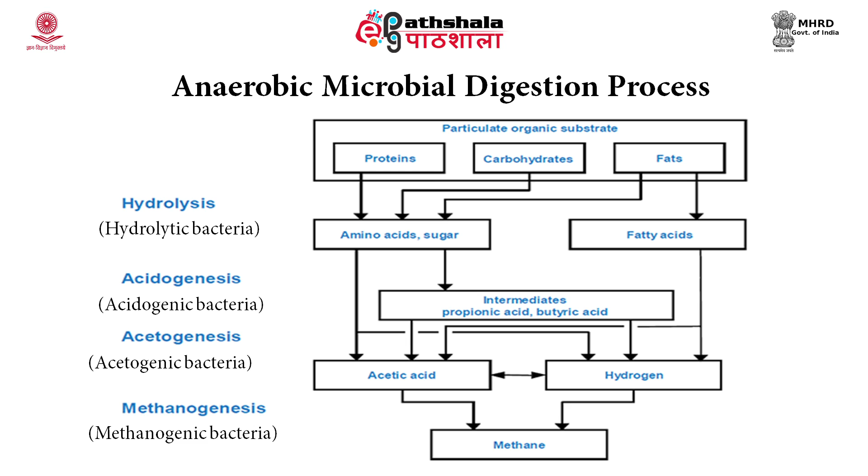Now the third phase is acetogenesis phase. In this phase, acetogenic bacteria play a very important role, and the intermediates are now being converted into acetic acid or hydrogen. Methanogenesis phase, that is the important phase. In this phase, methanogenic bacteria play a very important role, and they try to convert acetic acid and hydrogen into a valuable product, that is methane.

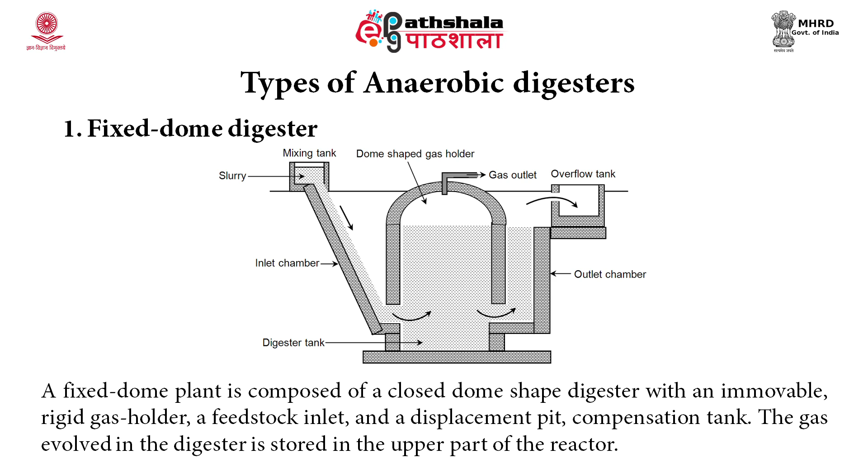In this slide, types of digester have been explained. The first we are taking is the fixed dome digester. A fixed dome plant is composed of a closed dome shaped digester with an immovable rigid gas holder, as the name indicates, that is fixed dome digester. There is a feedstock inlet and a displacement pit compensation tank. The gas evolved in the digester is stored in the upper part of the reactor, and it is being collected from the gas outlet.

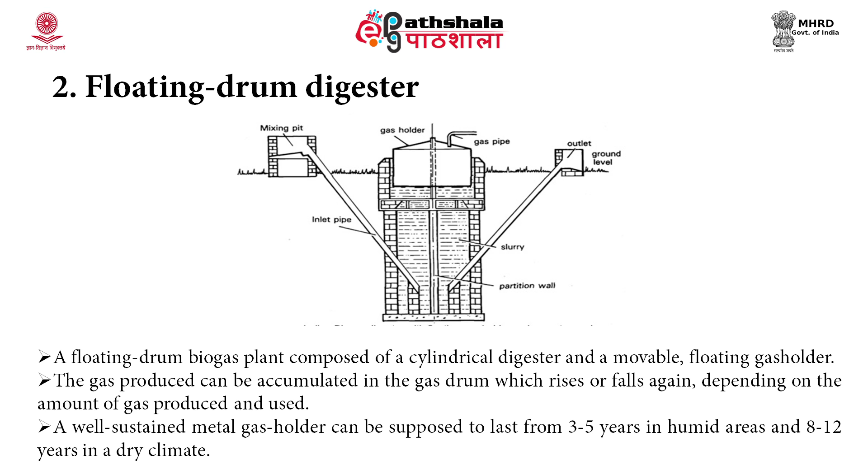Next is the floating drum digester. A floating drum biogas plant is composed of a cylindrical digester and a movable floating gas holder. That's why this digester has been given the name of floating drum digester. The gas produced can be accumulated in the gas drum, which rises or falls depending on the amount of gas produced and used. A well sustained metal gas holder can be supposed to last from 3 to 5 years in humid areas and 8 to 12 years in a dry climate.

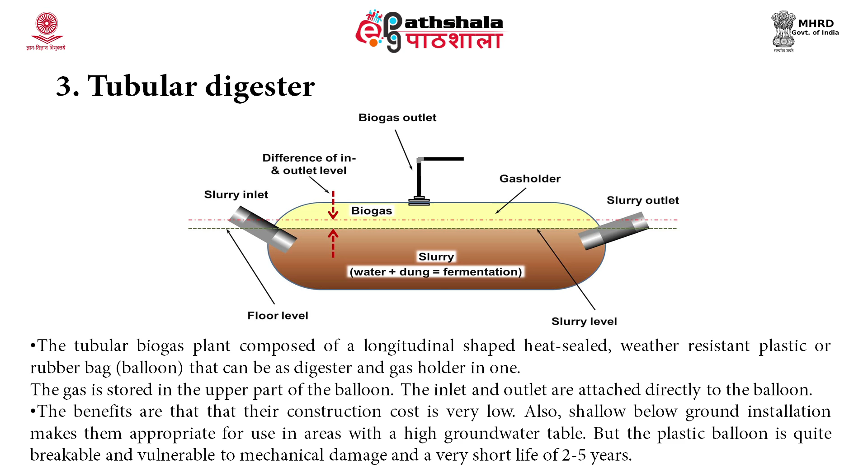The benefits are that their construction cost is very low. Also, shallow below-ground installation makes them appropriate for use in areas with a high groundwater table. But the plastic balloon is quite breakable and vulnerable to mechanical damage, and has a very short life of 2 to 5 years.

The term dry digestion is mostly taken to mislead that this process is to be performed in the absence of water. The bacteria involved in the anaerobic process require a wet environment, as I have already told, and are only active in the liquid phase of the substrate. So water should be added from time to time for proper functioning of the digester.

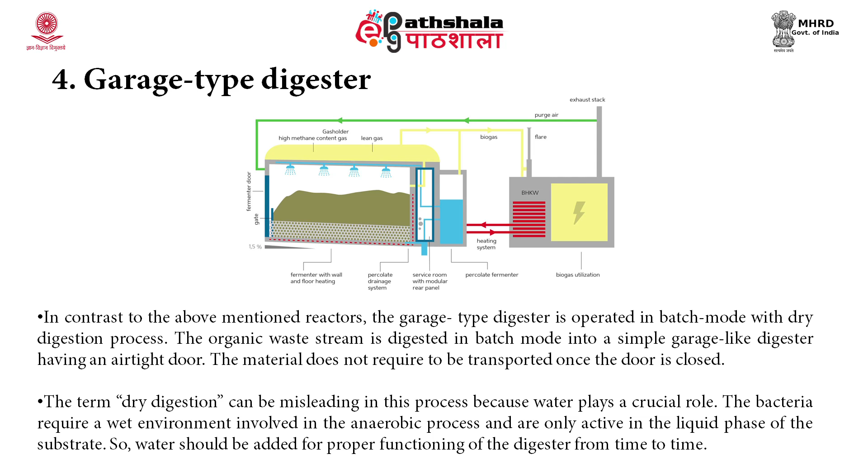Now the uses of anaerobic digesters. Anaerobic digesters, or their end products, can be used for various purposes. For example, agriculture. In agriculture, animal and crop waste are typically used as a feedstock for anaerobic digesters, and the energy produced can be used in homes.

Next is industrial. Organic waste from the food processing industries can be used as feedstock for an anaerobic digester, as it has three times the methane production potential that dairy cattle manure does. During the processing of food waste, the substrate may also be combined with manure to improve methane generation in the process.

Wastewater treatment plant. It helps to digest sewage sludge in anaerobic digesters and eliminate pathogens in the wastewater. Some municipalities have even begun to divert waste from landfills to wastewater treatment plants. This relieves the waste burden placed on local landfills and allows for energy production.

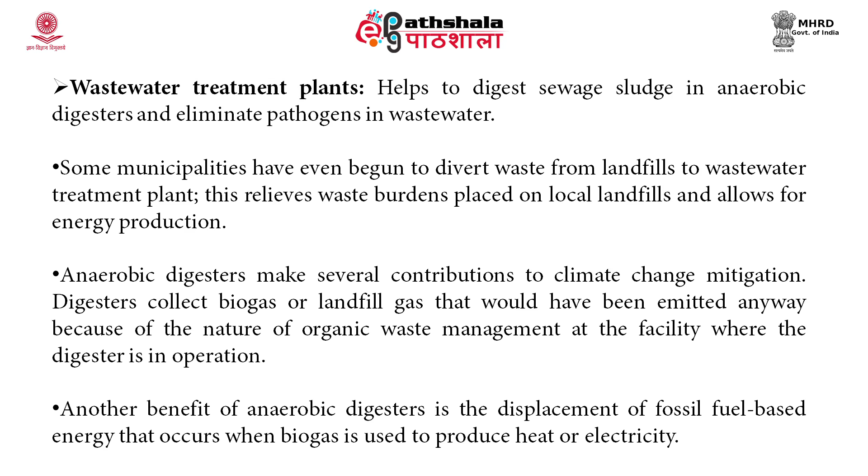Anaerobic digesters make several contributions to climate change mitigation. Digesters collect biogas or landfill gas that would have been emitted anyway because of the nature of organic waste management at the facility where the digester is in operation. Another benefit of anaerobic digesters is the displacement of fossil fuel based energy that occurs when biogas is used to produce heat or electricity.

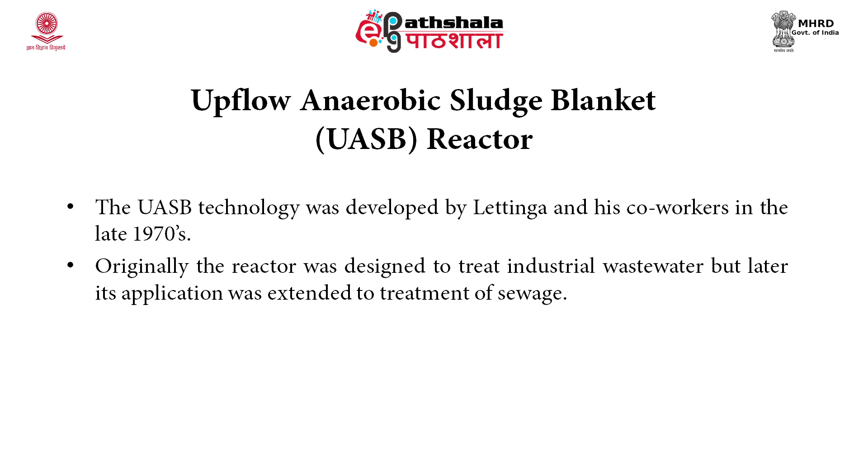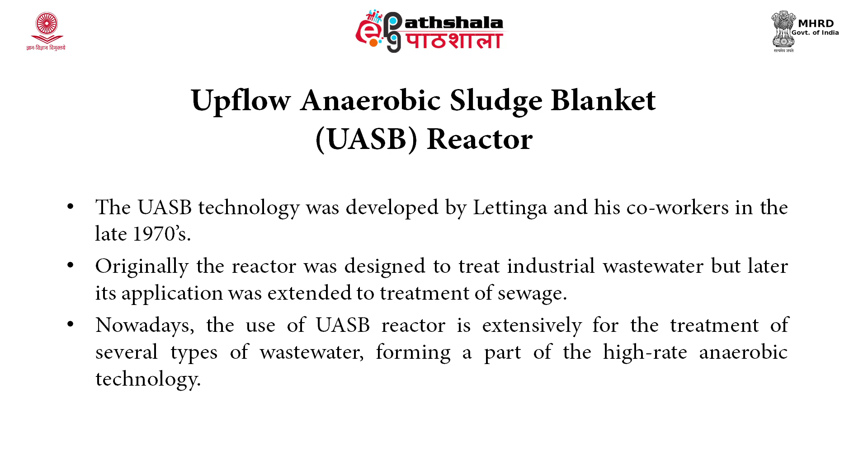Now I am taking the UASB reactor, that is, upflow anaerobic sludge blanket reactor. The upflow anaerobic sludge blanket reactor is a technology which was developed by Lettinga and his co-workers in the late 1970s. Originally, the reactor was designed to treat industrial wastewater, but later its application was extended to the treatment of sewage. Nowadays, the UASB reactor is used extensively for the treatment of several types of wastewater, forming a part of high rate anaerobic technology.

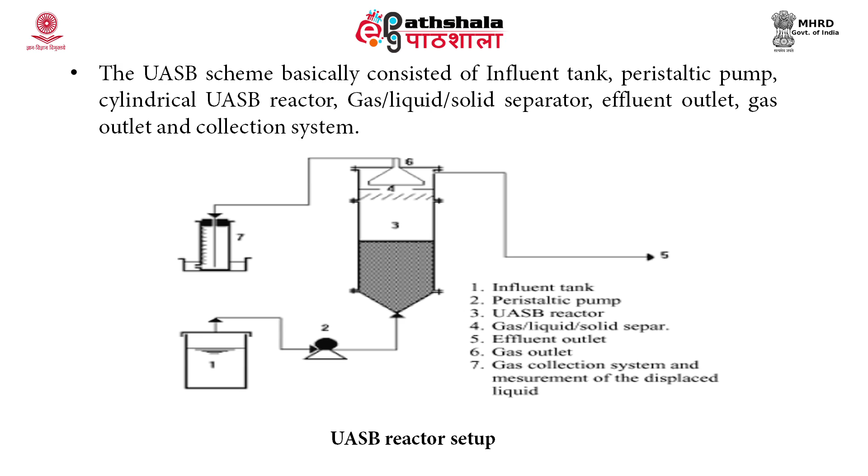Now, in this slide, the layout of the UASB reactor has been shown. The UASB scheme basically consists of an influent tank, a peristaltic pump, a cylindrical UASB reactor, a gas liquid solid separator, which is also known as GLS, an effluent outlet, a gas outlet, and a collection system. In this, the functioning of the UASB reactor has been explained by showing it in the diagram.

A UASB reactor is basically a tank that has a sludge bed in which the organic fraction of the wastewater is degraded, and as a consequence of this digestion, biogas is produced. The success of the UASB reactor lies in the development of a dense sludge bed at the bottom of the reactor, which is formed due to aggregation of suspended solids and bacterial population into flocs and granules.

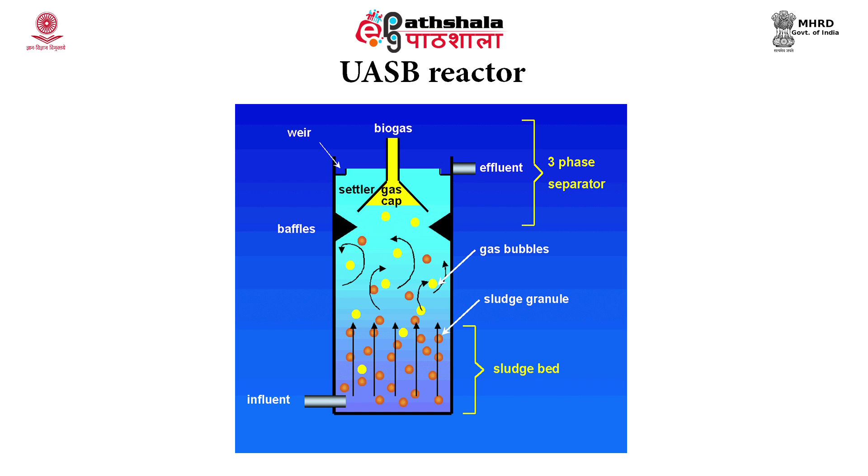The influent is pumped from the bottom of the reactor by a peristaltic pump. The wastewater comes in contact with the microbial sludge bed and gets treated, and the treated water is collected from the top. At the upper part of the reactor, a GLS separator is kept above the sludge bed, due to which a blanket zone is formed where some particles of biomass are suspended. This zone acts as a separation zone between the water flowing up and the suspended biomass.

Next is nutrients. The growth of anaerobic microorganisms depends on the availability of essential nutrients like nitrogen and phosphorus present in the wastewater. Deficiency of these nutrients could negatively affect the growth of microbes and also the efficiency of anaerobic degradation.

Next factor is hydraulic retention time. The hydraulic retention time is defined as the average time that wastewater spends inside the reactor. HRT is affected by both the flow rate and composition of wastewater entering the UASB reactor. High HRT increases the contact time of the wastewater with the sludge and hence improves the effluent quality and biogas production rate. Therefore, a suitable HRT is very important for proper wastewater treatment in a UASB reactor for better treatment efficiency as well as quality and quantity of biogas.

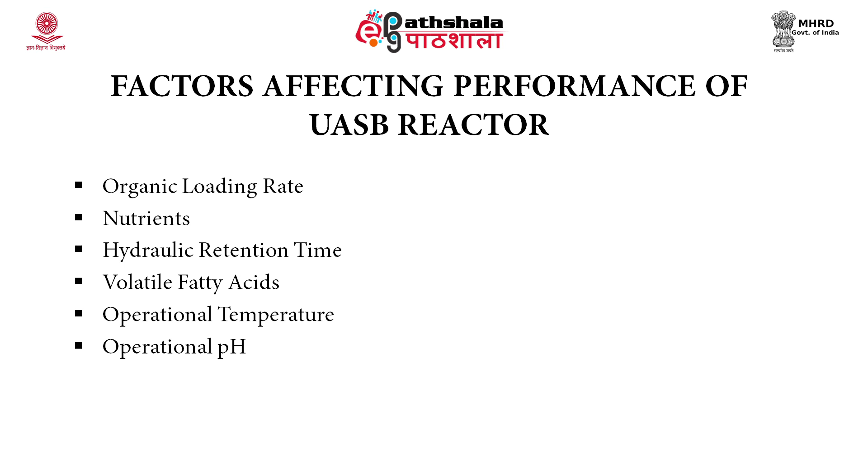Therefore, most anaerobic digestion reactors have been operated at pH between 6.5 to 7.5. The standard operating method to keep the pH in this range has been found to be the addition of lime and bicarbonate salts, or reusing treated effluent in the reactor.

Now, advantages of UASB reactor. It has high efficiency. Even at low temperature and high loading rates, it can work efficiently. Simplicity: its construction and operation is quite simple. It is also flexible. The technology is very flexible and can easily be applied on either a very large or a very small scale.

Low space requirement, as the height of the reactor can be increased or decreased according to the requirements. Low energy consumption: as heating of the effluent is not required to reach the working temperature and all plant operation can be done by gravity, the energy consumption of the reactor is almost negligible. Moreover, energy is produced during the process in the methane formation.

It also produces sludge in low concentration. The production of sludge is very low as compared to aerobic treatment processes, due to the slow growth of anaerobic bacteria. The sludge produced is stabilized for final disposal with good dewatering characteristics. The left sludge may be stored for a longer period of time without a notable reduction of activity, and can be used as an inoculum for startup of other reactors.

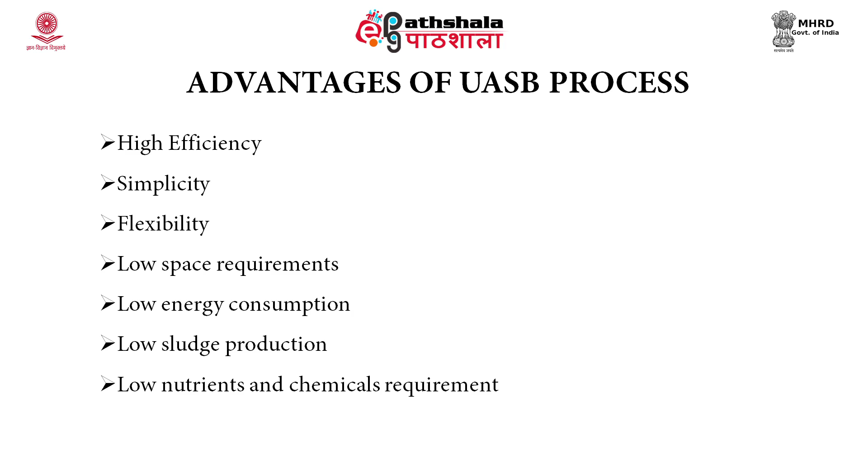There is a low nutrient and chemical requirement. Generally, sufficient and stable pH can be attained without addition of any chemical in case of sewage. Macronutrients, that is nitrogen and phosphorus, and micronutrients are also available in sewage, and toxic compounds are also absent. With the advantages, there are also some disadvantages of this UASB process.

For example, low pathogen and nutrient removal. Pathogens are only partially removed, except for helminth eggs, which are effectively captured in the sludge bed. Nutrient removal is not complete, and that's why a post treatment is always required. This process takes a long startup due to the low growth rate of methanogenic organisms. The startup takes longer compared to aerobic processes when no good inoculum is available.

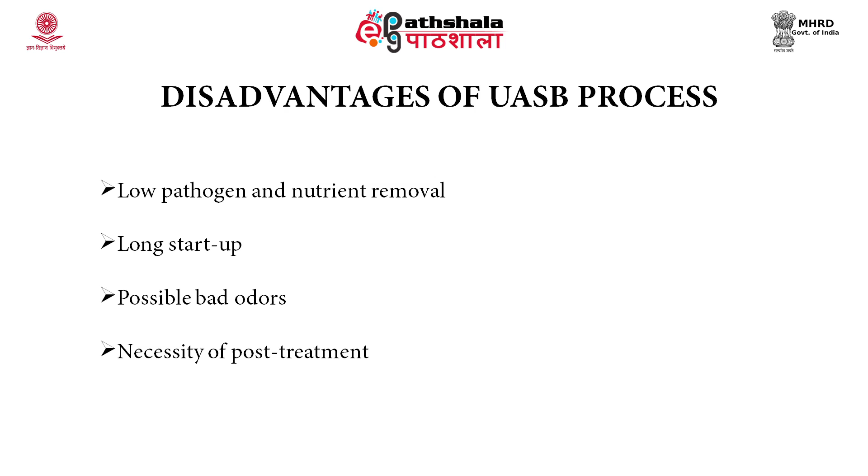Possible bad odors. Hydrogen sulfide is produced during the anaerobic process, especially when there are high concentrations of sulfates in the effluent. Proper handling of biogas is required to avoid this bad smell. There is always a necessity of post treatment. Post treatment of the anaerobic effluent is generally required to reach the discharge standards for organic matter, nutrients and pathogens. So, these are some of the disadvantages of UASB reactor.

Now, to conclude the lecture, anaerobic digesters are very efficient and from an economical point of view very good, if the energy being produced is used in a proper manner. Anaerobic digesters are also very cost effective, because they require very small land area for construction. Very little maintenance is required in the reactor, plus it is very smooth in operation.

On the other hand, the organic load is efficiently removed during the process, and the energy produced in the form of biogas, a very important part of these reactors, if used effectively and efficiently, can produce fuel to be used for various purposes. Therefore, these digesters can be used for small communities where the population load increases during the tourist season or the rainy season.

Above all, the treated water generated from the treatment process can be used for various purposes. For example, we can use it in flushing toilets, where most of our water gets wasted. We can also use it for car washing, horticulture, and gardening. So overall, it will definitely reduce the load on our natural resource, that is our water, if it is used effectively and efficiently.